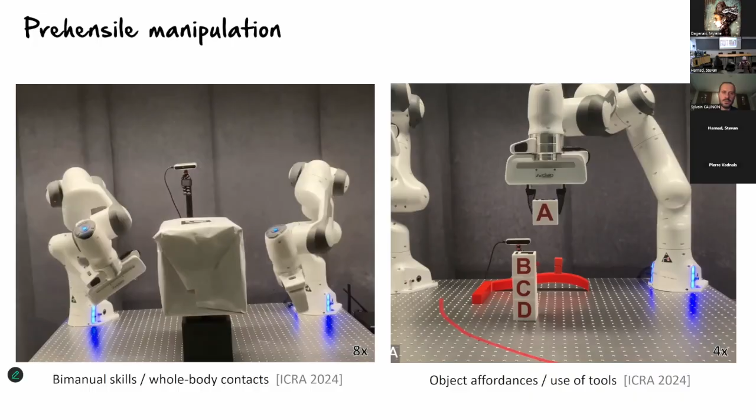We are also interested in non-prehensile manipulation. When we talk about a robot manipulating objects, we often think of grasping or gripping, but we have a lot of skills that do not directly involve the hand, and are more about exploiting the environment around the robot so that objects can be pushed or pulled.

This is required if we want to extend the workspace of the robot, because by pushing objects we can reach larger portions of the space. It can also be used to separate objects, which is very useful if we have a stack of objects and want to isolate one so it can be grasped more efficiently.

It can also be used to better perceive the scene. If we have a camera observing the scene with occlusions from objects hiding others behind them, pushing and pulling can separate objects so the vision system can determine their locations. Here we are sometimes talking about active perception, where the robot can change the configuration of objects in the environment in order to better locate and manipulate them.

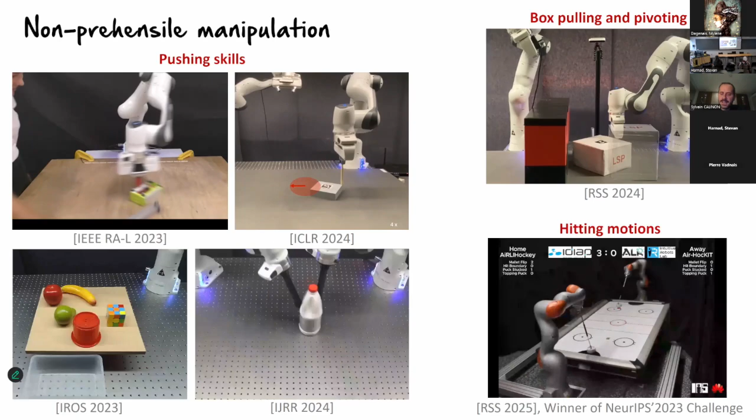Later in my presentation, I will show the importance of combining different learning strategies so that we can also acquire this very dynamic task, and see what's the role of the user and the role of the robot if we want to acquire such dynamic skills.

And since we are in Switzerland, we also have a lot of applications related to the watch manufacturing industry, so often we have industrial colleagues who are asking us to perform very precise tasks.

Sometimes it's complicated to do this very precise task. Here we need to really think about what precision means, because often when we do something precise ourselves, we use a lot of feedback. The same task, we often cannot do it blindly. We need to correct with some visual cues or tactile cues in order to become more precise.

And with robots, we can do the same. We can use sensors that can correct the movement. So even if the robot will be more precise than us, we can even go beyond this precision if we use a smart loop between the sensing and the motor control capability as a way to cope with errors and perturbations. This is also a topic that we study in our group.

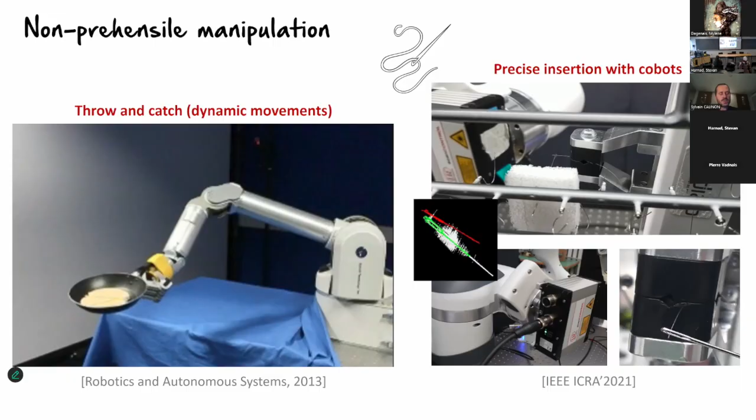So here I was talking about a robot that needs to produce something autonomously. But we have also a lot of applications that are involving both the user and the robot. So it can be broadly described as human-robot collaboration. It encapsulates a lot of robotics problems.

If we think of prosthetic devices, it's a robot, but collaborating with the user. If we think about teleoperation, it's also another kind of collaboration where the user needs to teleoperate the distant robot. And if the teleoperation system is nicely done, it means that the user should feel as if the user was in the shoes of the robot. So ideally, we would like the user not only to control the robot, but also to have some feedback about what the robot is doing.

And here we have a lot of research questions regarding sensorimotor aspects, and here with delays, because we have a very large delay between this teleoperation center and the remote robot. So here we actually solve the problem by thinking of this as two different loops, if you wish, where we have a local loop that can correct very fast when there are perturbations, and another loop that is much slower and that is involving higher level components in the task.

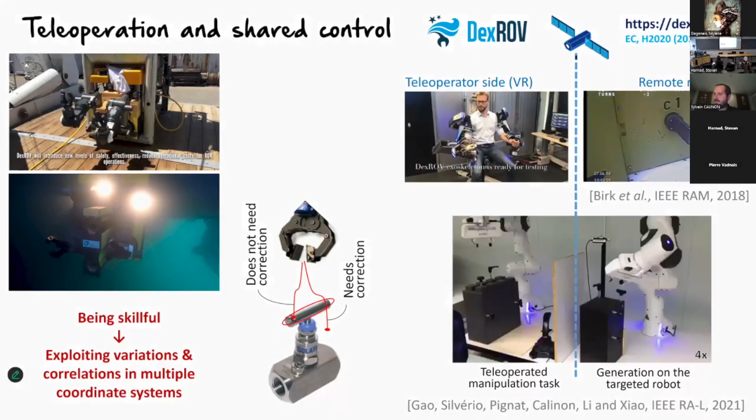So that was an overview about what kind of experiments we consider in our group. Now it's a good moment for me to ask you another pedagogic question. You have a very full slide there with several things happening at the same time. Do you have any strategic advice to us where our eyes should be looking?

With the videos? Yeah. So yeah, they were run one after the other, but I will try to use the mouse pointer next time I show videos so that you see what I'm showing. Yeah.

All right, so behind these experiments, we have learning from demonstration components. It's one of the key technologies we use in our group. And by learning from demonstration, I mean going beyond some record and replay problem. Sometimes some of my colleagues think that we are just collecting a demonstration, like recording a movement, and later replaying the exact same movement. But in reality, learning from demonstration is much more than this.

If we think of a robot that has to grab a box and hold the box, then what we would like is to have this robot being able to adapt to new boxes. If I'm changing the locations of the boxes, if I'm changing the shapes of the boxes, then the robot has to understand what were the essential aspects of this task that need to be replicated.

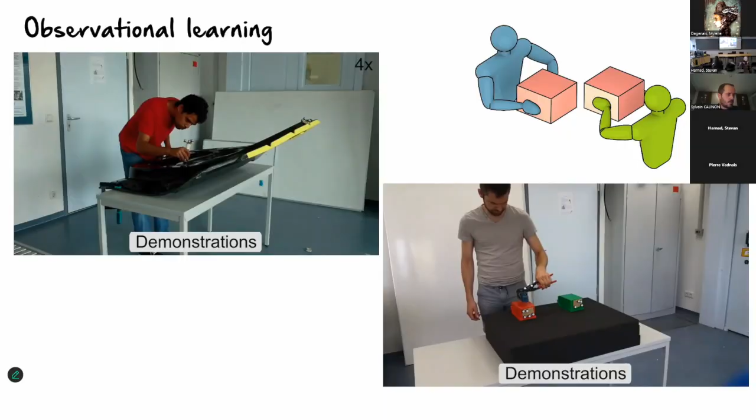So a first way to do this is to use cameras. It can possibly be with markers that we attach to the tools we use, to the objects we use. And these cameras are here to record what we would like to record as movements of objects and movements of hands. That's the first approach. It's sometimes called observational learning.

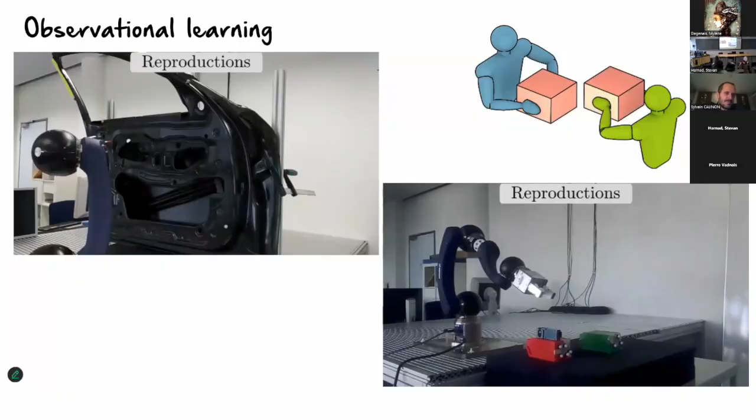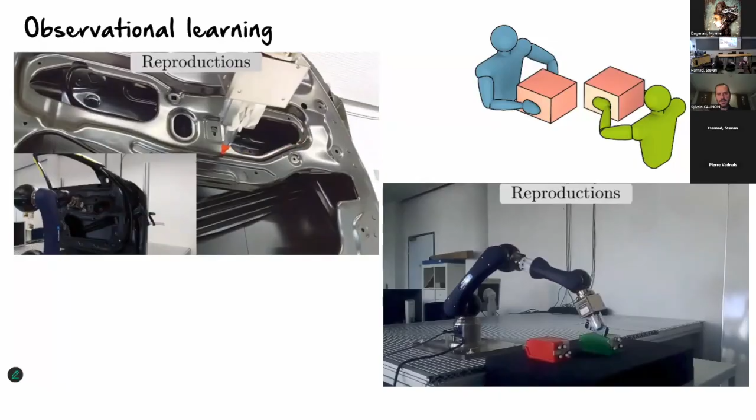The pros and cons of this technique: what's good is that the user doesn't need to care about the robot, the user is just executing the task. What is bad is that when you do this, you might provide demonstrations that the robot cannot do. Maybe you are doing a movement that is too fast for the robot, or using too much space around yourself, and the robot has a very limited workspace.

So it might mean that we are recording something that is very hard for the robot to do. It has really these pros and cons: simple to implement, the user doesn't need to care about the robot itself, but with the disadvantage that the mapping problem will be more complicated. So that's one way, observational learning.

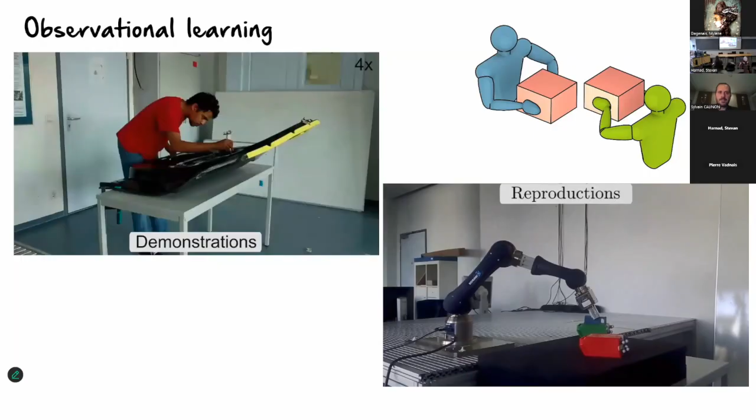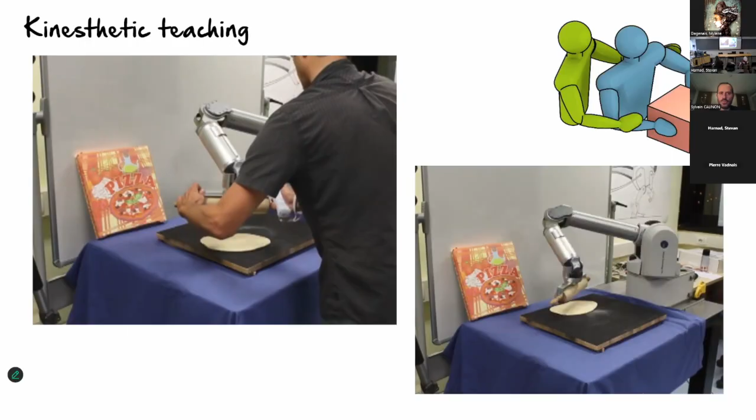Another way is to grab the robot by the hand and show the robot with its own body what to do. It's sometimes called kinesthetic teaching. Here you see this example with a dough rolling task, where we teach the robot how to change the movement according to the shape of the dough. In this case, it was provided with this kinesthetic demonstration technique. I will come back to this aspect later.

I will have another demonstration also using kinesthetic teaching. Here, the advantage is that we demonstrate something that the robot can do, because we use the robot's body to do the task.

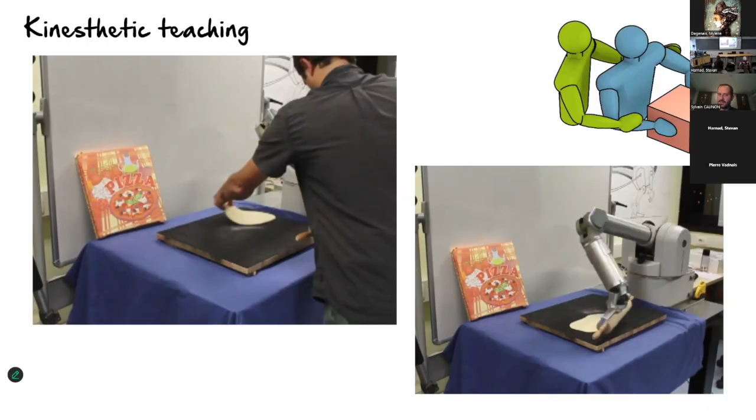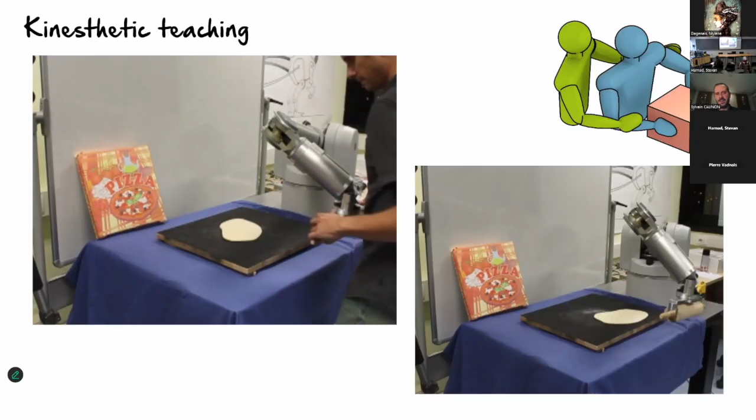But it's more complicated to show this task because we need to consider both the task and the robot limitations, so it's not necessarily intuitive. Sometimes we don't know exactly where the motors are, how the robot is articulated. So it requires some practice by the user, but the user will still be quite good at doing this. If you ask someone not knowing robotics to play with the robot for 2 minutes, the person can already demonstrate some task to the robot.

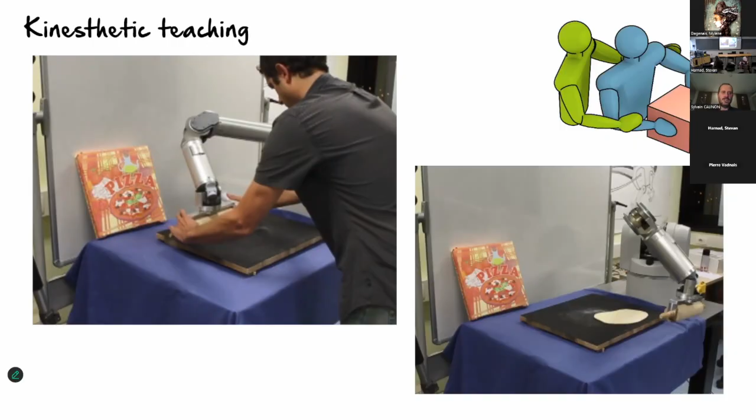Another possible disadvantage is that the user can control only a few degrees of freedom. You have this articulated chain, but we have 2 hands, so we cannot move the whole robot. If it's an arm, it's okay, but if it's a more complicated system like a humanoid, and you would like to move the two feet, it's nearly impossible to demonstrate what it means to walk by just moving the feet with two hands. And if you have multiple persons doing it, it becomes even more complicated because you need these persons to synchronize in order to demonstrate a task that is inherently coordinated. So it's also not a very good way of using kinesthetic teaching.

So that's, in a nutshell, the pros and cons of kinesthetic teaching.

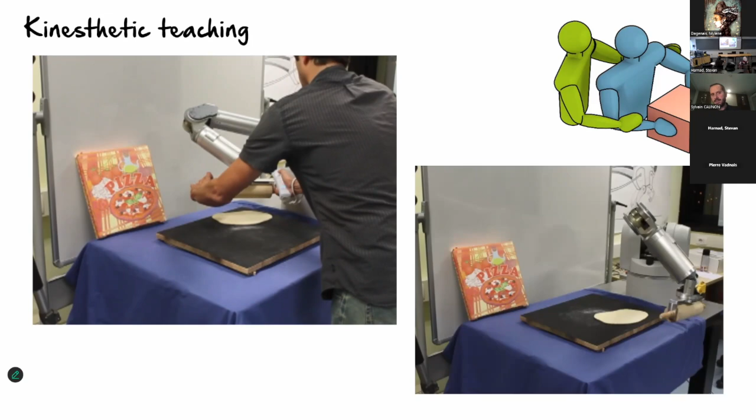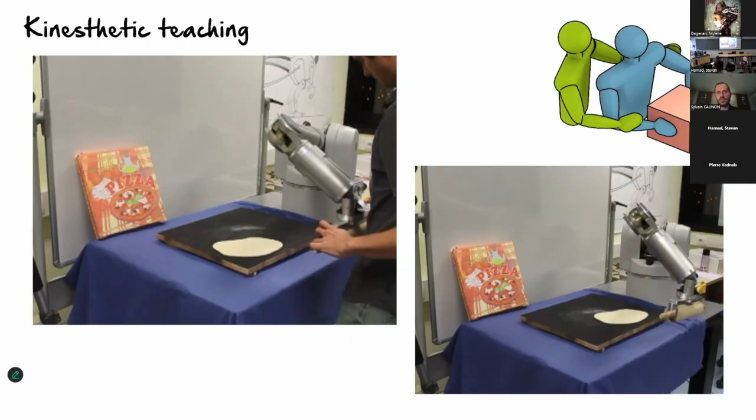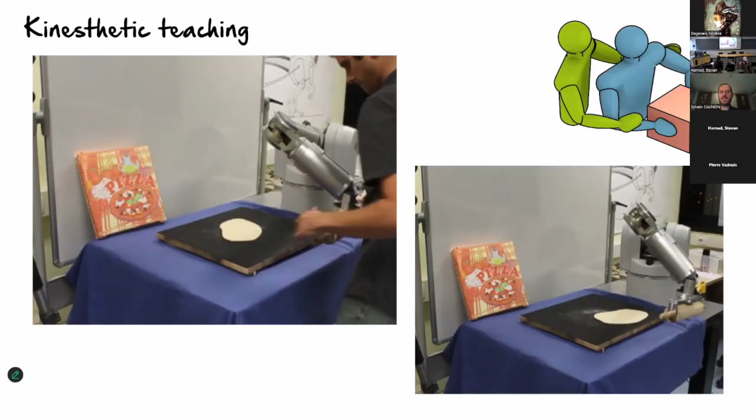Something I should also mention is that the robot here is helping us when we do this - it's actually carrying its own weight. So on a technological level, the robot is controlled: we send motor commands and ask the robot to compensate for its own weight. We do this mathematically by knowing the different weights of the different body parts of the robot, so we know what force commands to send to compensate for the effect of gravity. This helps the collaboration so the user doesn't need to care about the weight of the robot - they only have to care about the limited workspace due to this articulated chain that we need to move in space.

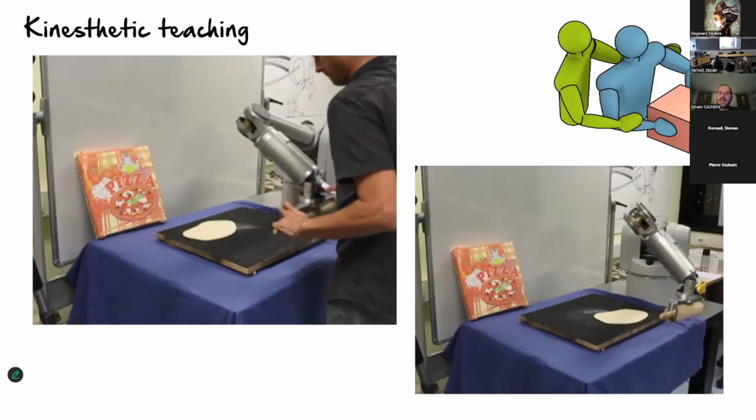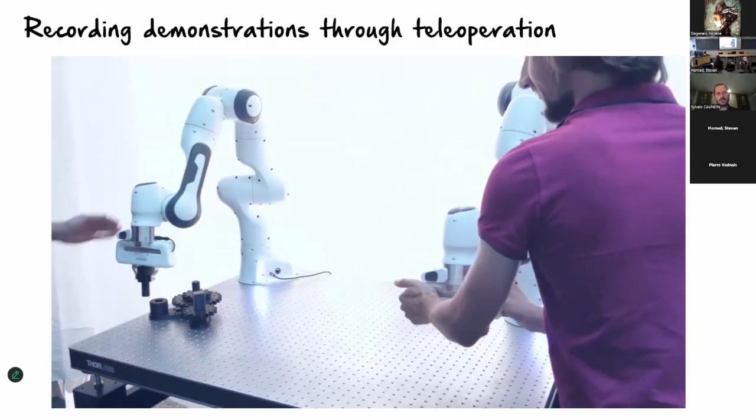The advantage of this teleoperation technique compared to kinesthetic teaching is that the user can also get feedback about the force. So when inserting the gears, you also demonstrate to the robot what to do when we feel resistance, what kind of force we need to use. It's a way to demonstrate not only movements and positions, but also a sensorimotor capability. If we have enough examples, then we can demonstrate what to do in different situations.

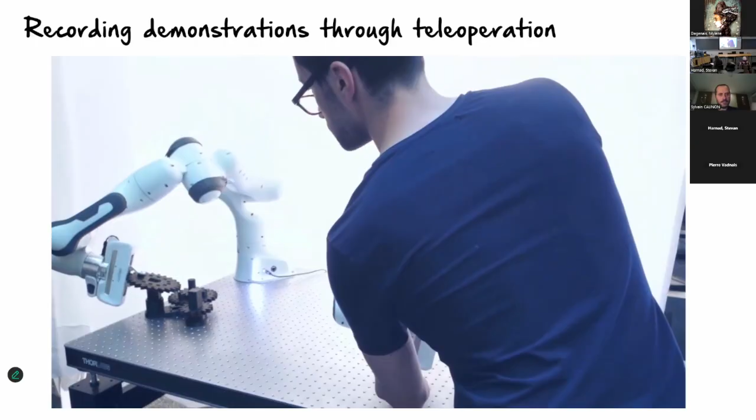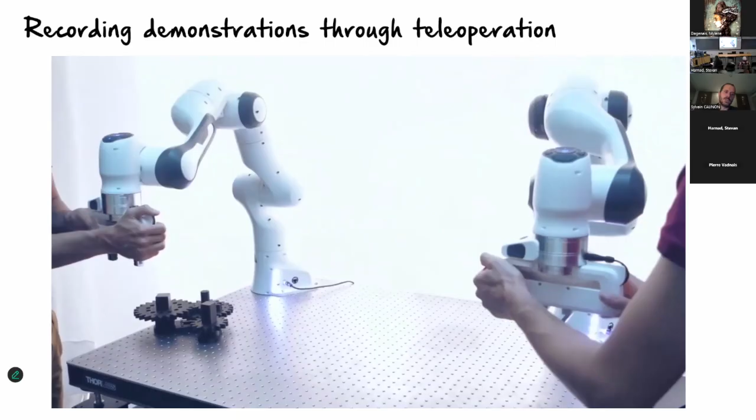This is important for assembly tasks because sometimes there are things that are really small, like when inserting these gears - sometimes it can get stuck. Visually you don't see the difference, but only haptically can you feel that there is resistance and that you need maybe to apply more force or try to redo the task once more.

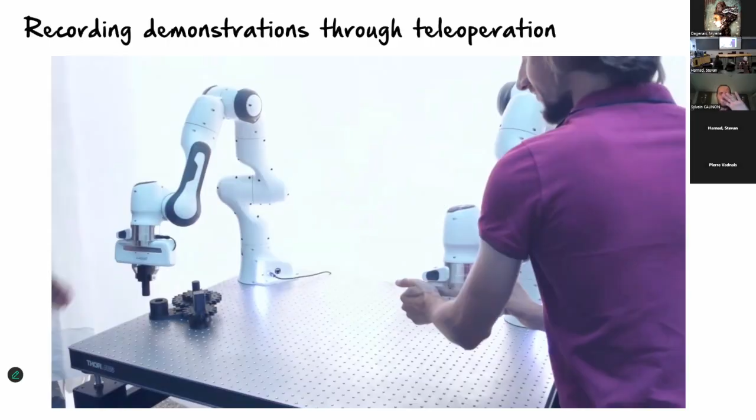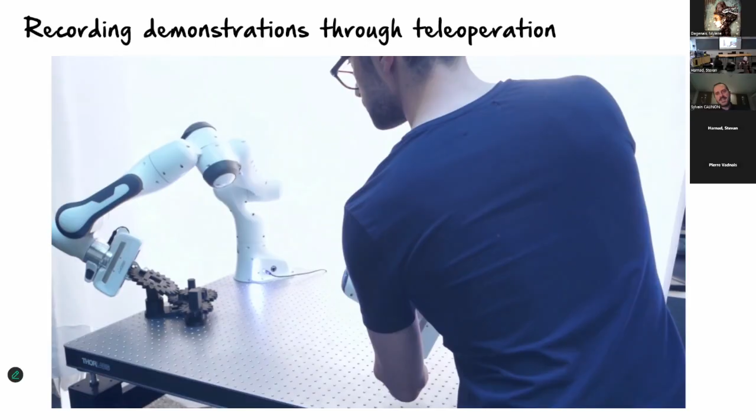Something else I didn't mention is that all of these demonstration modalities come with the user interface aspect. These are actually some forms of user interfaces that try to mimic, broadly speaking, what we would do if we took the arm of someone to demonstrate a task, or use vision as a way to show someone what the task is about. But we also have other technologies, like augmented reality interfaces, simulators, and graphical user interfaces that we can use in complement of this.

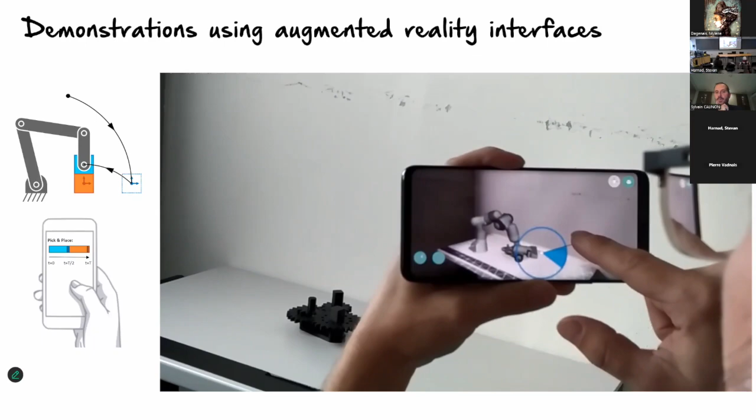So another research topic to transfer skills is to also look at solutions based on mobile phones, as in this example, or other kinds of modalities that go beyond the standard interaction between two persons. And the goal is to know how to use these different techniques efficiently.

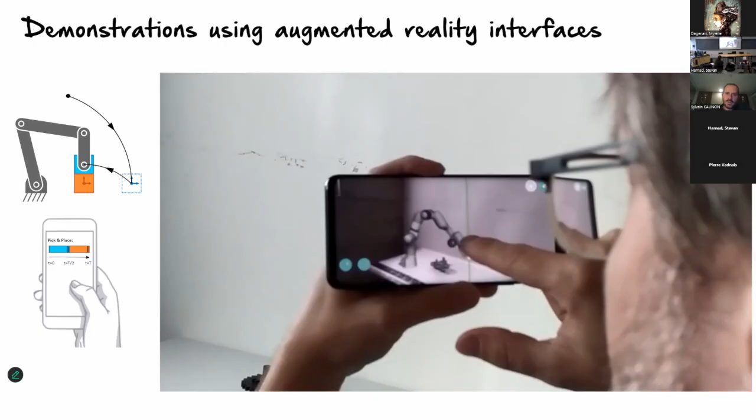I will illustrate this with an example. It's a learning example. You will see that these two robots will learn a very Swiss task: to serve raclette cheese.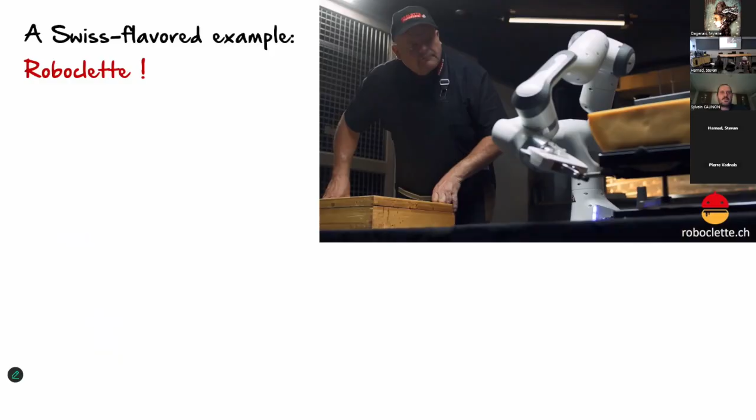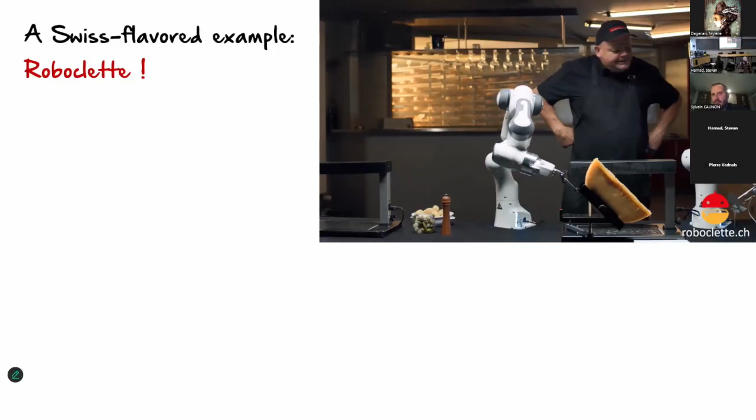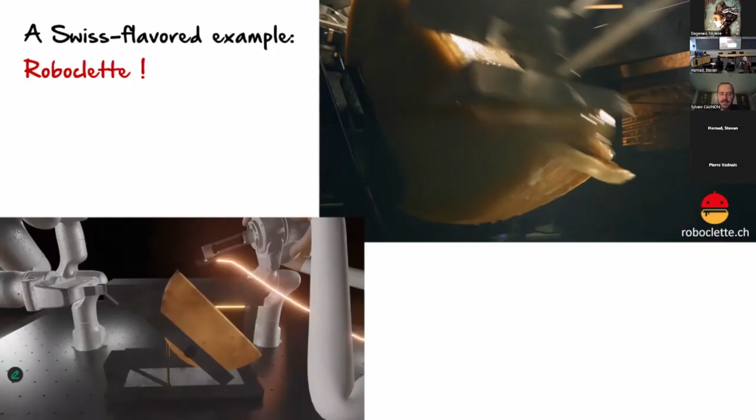We did this video as a way to discuss learning capabilities and the role of machine learning in robotics. So here it's like the promotional video you see on the top right, and on the bottom left corner I will explain what's behind. What's behind is exploiting this kinesthetic teaching mechanism with someone who is not an expert in robotics, but who knows how to do this skill manually.

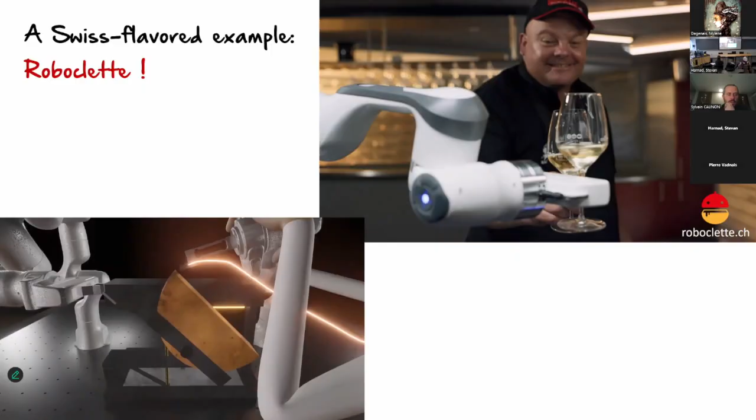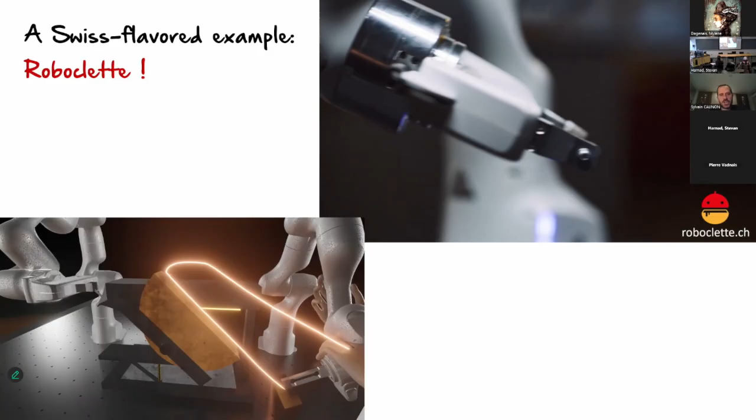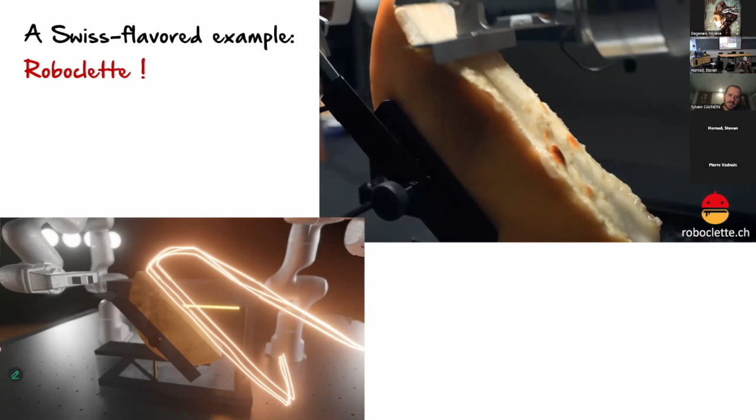The goal is to record what the person is doing. We record movement, but also force, and how this force changes with time. We also learn what to do when the cheese is melting, because demonstrations will not be the same depending on the size of the cheese. So depending on this, we will have different kinds of offset in the movement. The goal is to learn that, as well as this force component, which is varying in time.

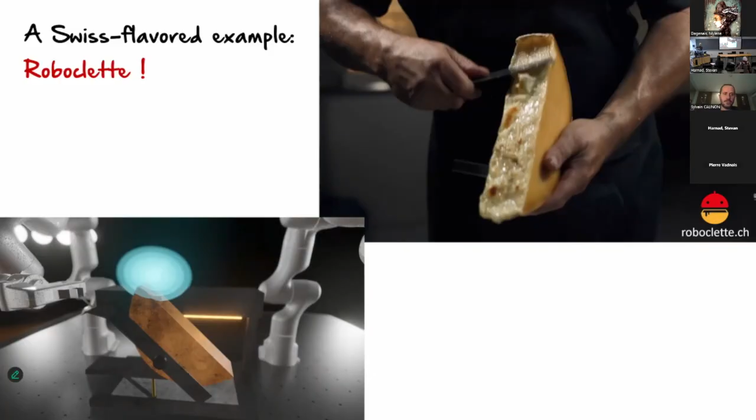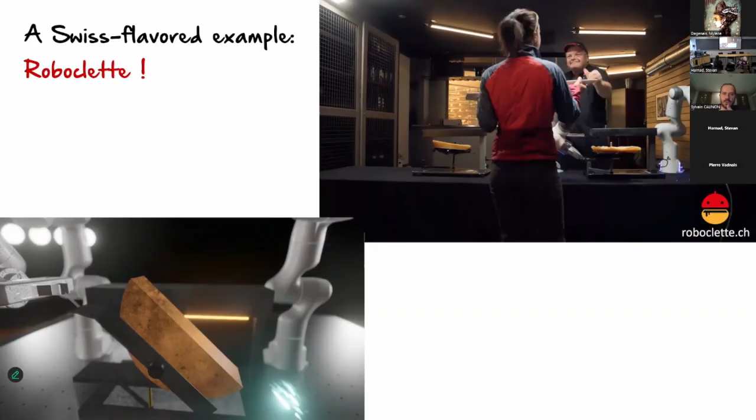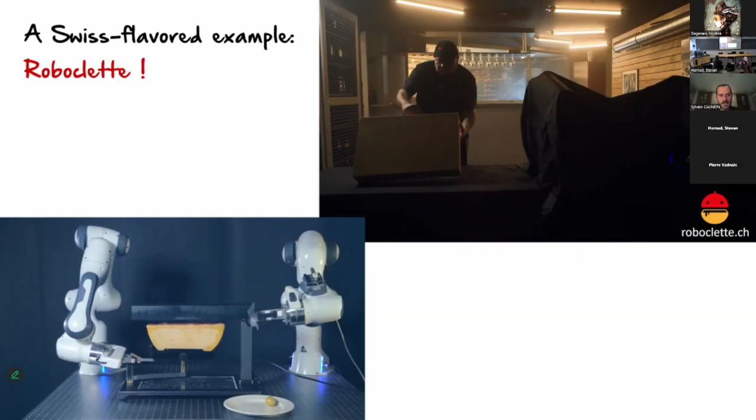There is also something highly dynamic - if you try to slow down the same movement, the task will not be replicated correctly. So it's about understanding the dynamics behind it. This promotional video already shows what kind of challenges we have as an interface to demonstrate the task, what needs to be recorded, and what needs to be adapted to new situations.

Learning is actually more elaborate than a one-way process where we have the demonstrator and the imitator. It's more than this - it should ideally be in a loop. It should be more of an interaction.

That's something we are defending in our group: we talk too much about machine learning, but we should also talk about machine teaching, active learning, curriculum learning - in the sense that we should learn in a specific order. We need to start with something simple and have examples that are more and more varied or difficult, if we want a learning robot that can acquire skills faster.

We also need to consider different learning strategies. It's not only learning from demonstration, it's learning from demonstration combined with other strategies. If I'm giving the example of learning how to play football, I cannot learn just by watching TV - it would be useless. Watching demonstrations and not practicing would not work.

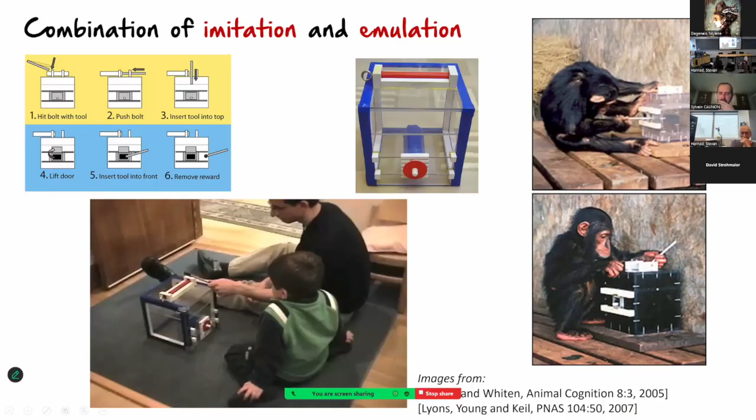But yeah, I did find that what you said about understanding quite interesting and relevant. I think I want to talk more about this after Christmas when it's my turn. I'm going to probably do more on the philosophical side there. So I do wonder whether there's one sense of understanding involved in like roboticist goal achievement, and when you talk about language understanding, right? That seems like a very, well, that seems contentious, even though what I'm going to say is probably in line with it, is actually the same. But yeah, that's just the thought that occurred to me when we just talked about it.

Sorry to put you on the spot like that, but we're about to bridge two weeks in between now and January, so I thought we have to make a direct connection there. Now I'm inviting other people. You're allowed to ask your questions in English or in French.